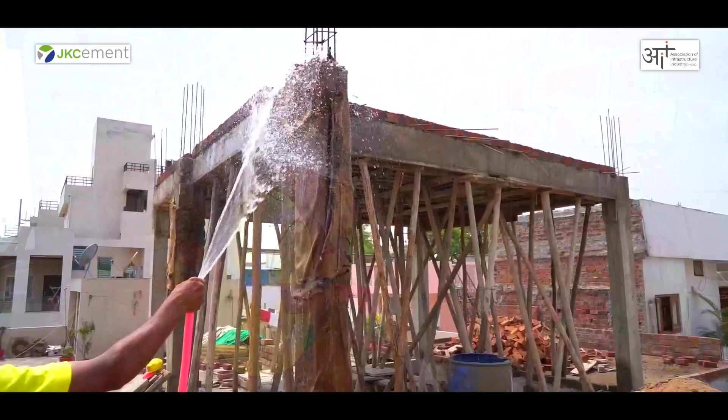The way one person should look at is first refer to a standard document known as Indian Standard for Earthquake Design, and that document has a seismic zone map, in which the entire country is divided into 4 seismic zones. So zone 5 is the most earthquake prone area and zone 2 is the least one. During earthquake shaking, what happens? The vibrations start from the ground level and then the shaking gets propagated upward in the vertical direction.

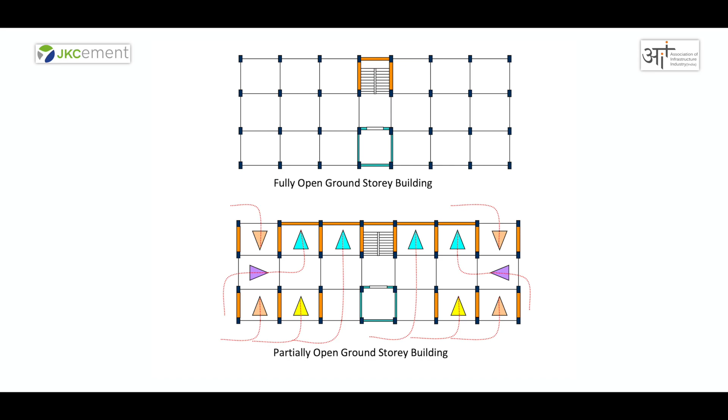Now if you are looking at a brick masonry house, which we commonly see in the rural areas, there we can have damages in the bed joints of the mortars. Even the bricks can themselves get crushed, the walls can collapse in the in-plane or out-of-plane direction. The primary intent is that if you have a large number of earthquake shakings of minor intensity occurring over the year or over the entire service life, the building should remain undamaged. However, not that frequent earthquakes which have large shaking can cause damages, but those damages should be repairable.

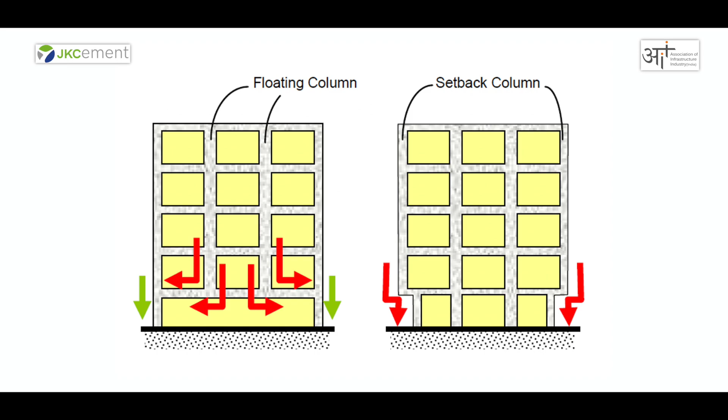First, let us talk about the reinforced concrete building or the frame building. There we need to provide a special type of detailing and configuration for the steel reinforcement bars which we are going to use in beams and columns. That detailing is known as ductile detailing. When we have the reinforcing bars in the columns, when we take 2 bars and try to provide the entire height through these overlap lengths, these lap lengths or overlapping regions should not be at the floor level or at the roof level. It should be at some intermediate story location, at intermediate height.

Then when we look at the reinforcement in the columns or in the beams, we also see that the main reinforcing bars are enclosed by such rectangular configurations. These are known as stirrups in beams or ties in columns.

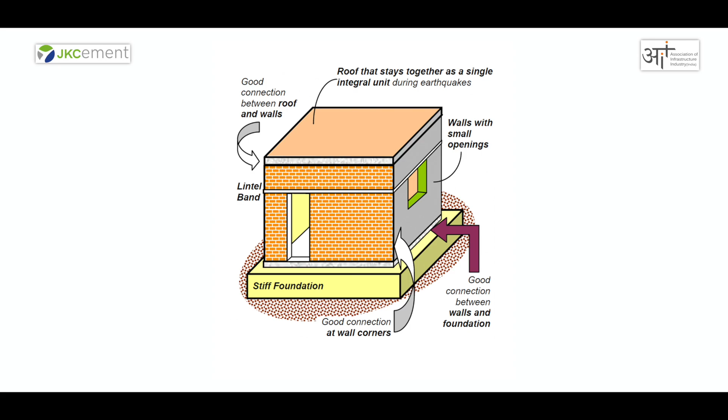For the brick masonry building, when you look at the roof, you already have some roof slab which is kind of holding the walls together. At the lintel level, just above the door or window opening, you must have a continuous reinforced concrete band running all along the periphery of the home. Similarly, at the window sill level, leaving apart the door openings, such a reinforced concrete band should run. Same thing should happen at the plinth level also. These bands are primarily intended to hold all the walls together. When the entire building shakes during an earthquake, the walls should not behave on their own. The bands are supposed to hold all of them together.

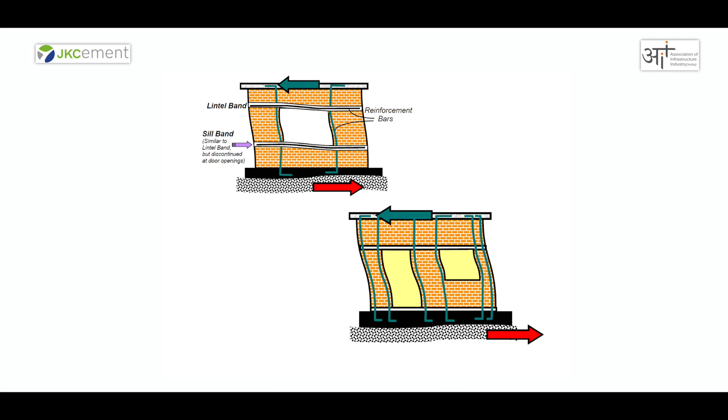So the plan of the building should be such that symmetry is maintained as much as possible. The reason being, once you have earthquake shaking, the asymmetric nature tends to twist the building, which can be extremely detrimental. So that is the plan symmetry. If you look from the vertical point of view, the shape should be as straight vertical as possible. Why is it so? Because we frequently use 2 types of configurations known as floating columns and setback columns.

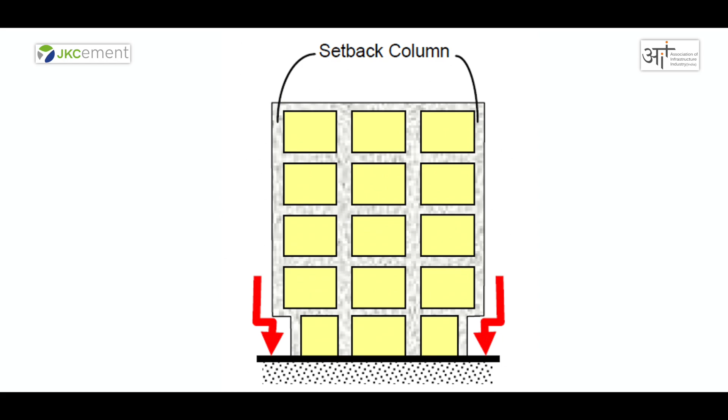If you have a column coming from the roof level and then it suddenly gets terminated at the first floor level, that is called a floating column. Whatever is carrying the load from the roof to that first floor level needs to find a proper way to transmit the load to the foundation. So the connecting beams need to be designed for that. Similarly, you can have setback columns, where again such vertical irregularity can happen. So floating columns and setback columns must be avoided.

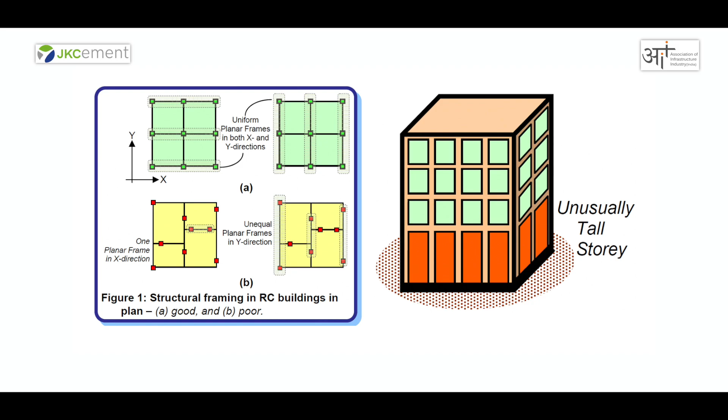Specifically in zones 3, 4 and 5, when we are providing the foundation in terms of shallow footing, just rectangular footing at 1 to 1.5 meter depth below the ground level, all those footings should be tied by a foundation beam, also known as tie beam. We need to have proper geotechnical investigation to ascertain the soil properties, whether shallow footing will suffice or you need to go for a deeper foundation. So that is the second aspect.

Third aspect is that from seismic characteristics, we use a term liquefaction, in which the soil tends to behave like a liquid during heavy earthquake shaking. There are specific properties of the soil under which it can liquefy. When we look at the requirement of water tanks, those water tanks should be secured to the rooftop, either to the building columns by making the water tank monolithic reinforced concrete with the columns, or you need to have anchor bolts or fasteners which also need to be designed against unseating.

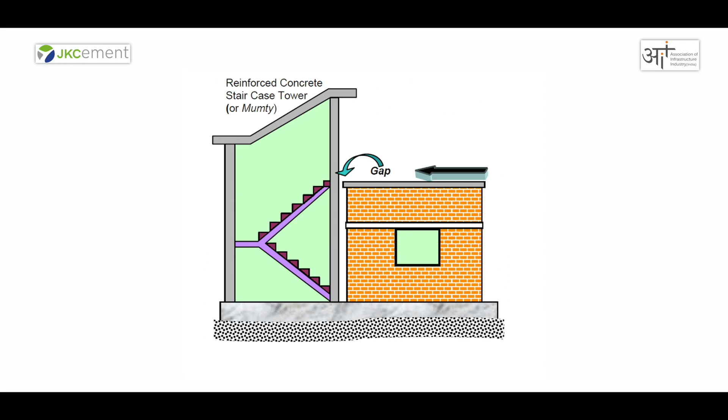For the staircase, better practice is to separate out the staircase tower from the main building. The staircase itself is a standalone tower. So let it vibrate on its own. Let the vibration not affect the beams and columns or the brick masonry building itself.